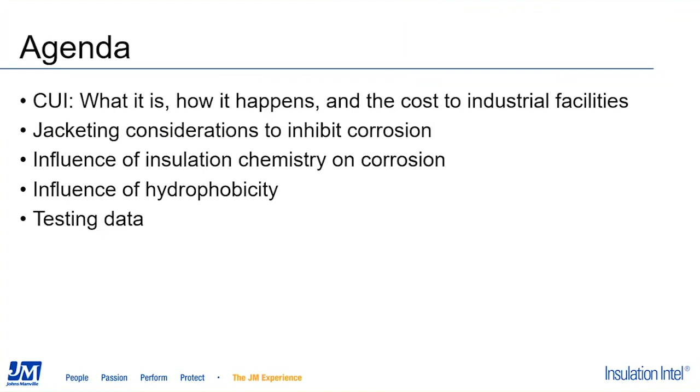So let's get started and take a look at what we're going to cover today. We're going to start by looking at corrosion under insulation, or CUI, and do a brief overview of what it is, how it happens, and its impact to industrial facilities and the global economy. Then we'll look at different aspects of corrosion under insulation and consider the impact that jacketing can have on inhibiting corrosion, the influence of insulation chemistry on corrosion, and the impact that hydrophobic or water-resistant insulation products can have. We'll follow that overview with detailed information on different testing performed to evaluate the direct impact of different insulation materials on corrosion under insulation.

So let's get started and take a quick look at corrosion under insulation. In 2013, NACE, the National Association of Corrosion Engineers, did a global study called the Impact Study to try to assess the cost impact of corrosion. They concluded from the results of their study that the global economic impact was about $2.5 trillion.

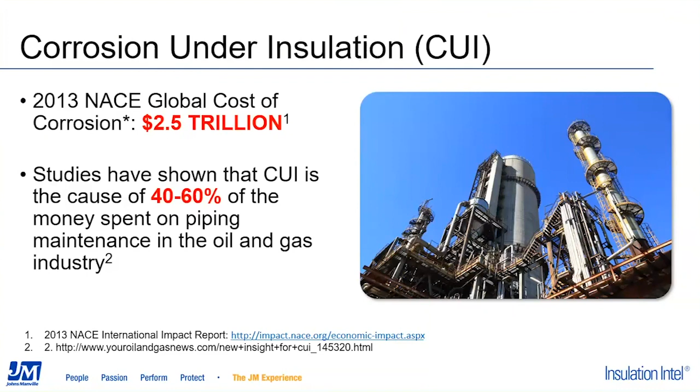Additional studies have been done looking more specifically at the impact of corrosion on corporate spending for maintenance budgets, and have shown that in the oil and gas industry in particular, about 40 to 60% of maintenance budgets are typically allocated toward addressing the impact of corrosion under insulation. So you can see that the financial impact is quite significant.

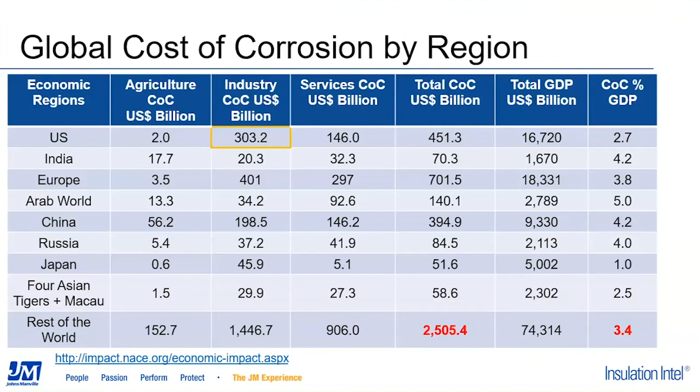On a global basis, that $2.5 trillion figure represents about a 3.4% impact on gross global product. So again, reiterating that the financial impact of corrosion is very, very severe.

For corrosion to occur, you actually need a combination of conditions to be present. Those conditions are the presence of oxygen and the presence of liquid water. While water vapor itself will not create corrosion, it doesn't take much for water vapor that gets into an insulation system to turn into liquid form. So if you have significant water vapor ingress in your system, you do have the potential for corrosion to occur anyway, because it's very likely that it will turn into liquid water.

You do need a corrosive environment, and that can be either corrosives entering the insulation system from the outside environment, or potentially corrosive compounds or materials being leached out of the insulation system itself. That needs to be acidic, or have a pH of something less than 7. And then the system needs to be operating in what is referred to as the corrosion zone, typically considered to be that temperature band between 100 and 350 degrees Fahrenheit.

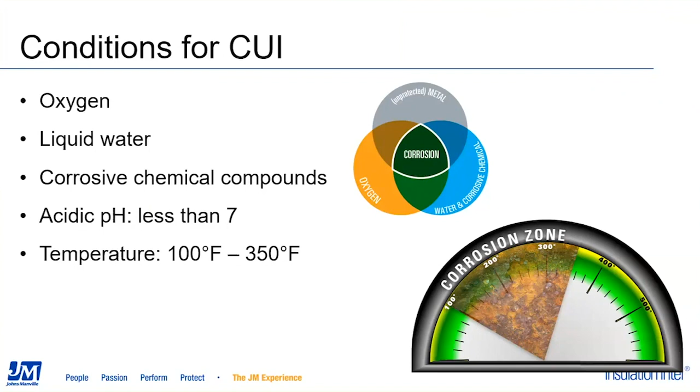So you can see there are a combination of conditions that need to be present, and some environments will introduce those conditions to a higher or lesser degree than others. Therefore they have a significant impact on the exposure of the system to the opportunity for corrosion to occur, and also impact the type of corrosion that happens and the rate at which it happens.

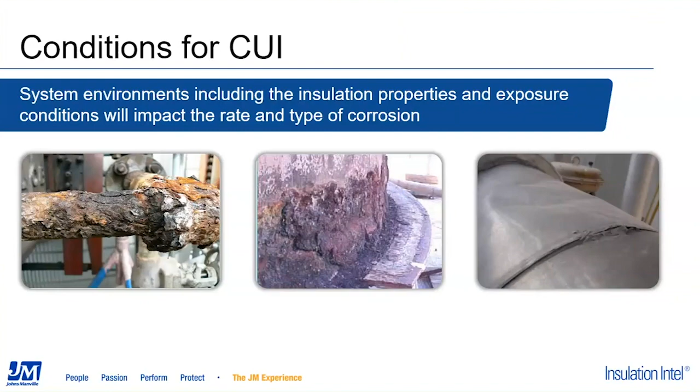And now Chad will talk a little bit about the different types of corrosion that we can have. There are several different types of corrosion that we can see. We can see 2 dissimilar metals in the environment causing corrosion to each other.

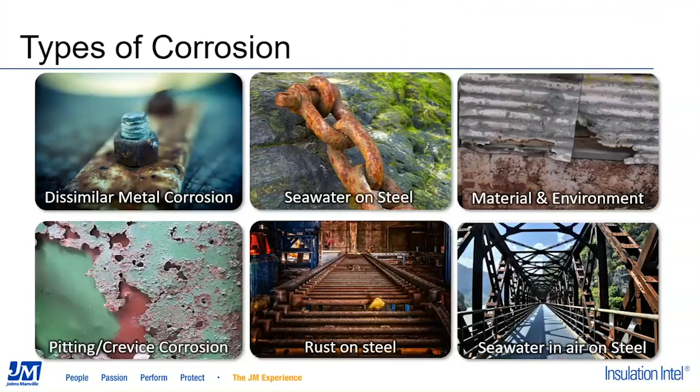You can have salt water in direct contact with steel. You can have salt water just in the open air over time corroding the steel. You have simple rust on steel, or materials in the environment over time causing corrosion. But what we want to focus on today is more of the pitting or crevice corrosion that can occur.

What is pitting corrosion? Pitting corrosion is a more localized form of corrosion. This can form holes or pits in the metal. This occurs when one area becomes anodic compared to the other areas around it, and this can lead to a failure with minimal overall metal loss.

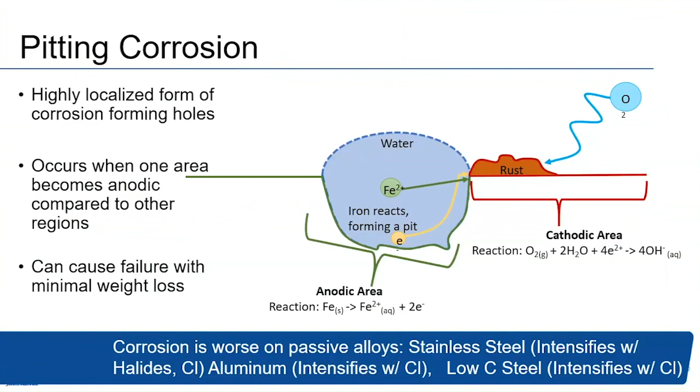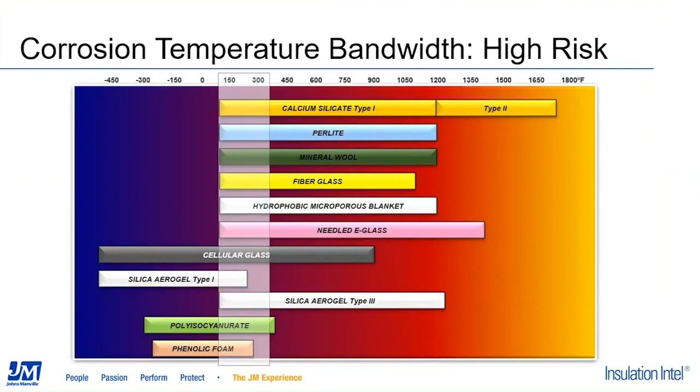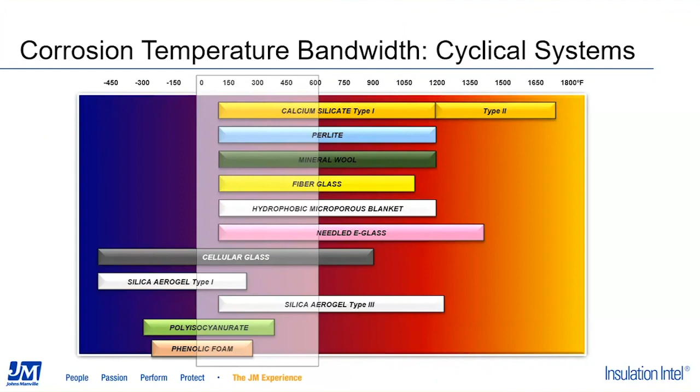The other area we want to talk about is a cyclical system. It's going to cycle between hot and cold, anywhere from below 0 up to 600 degrees. Could be a simple steam system that for half of the year is running steam distribution and the other half is running ambient. But this is what we would call more of your critical system for CUI. So if you have something cyclical, you want to pay a little more attention to a system like this for CUI concerns.

So how can we inhibit or prevent CUI? Some people would say that we really can't prevent it, all we can do is slow it down. So we're going to take a few minutes today to talk about how the insulation itself, the chemistry, can impact CUI, and how the metal jacket can be your first line of defense.

Hello, this is R.T. Boehm, and I will be discussing the metal portion of the webinar as it pertains to CUI. There are 3 important aspects of metal jacketing and how they relate to reducing the amount of corrosion that can occur, including the classic CUI on pipe, tank, and equipment, but also corrosion to the metal jacketing itself. The 3 primary aspects are metal types and alloys, the value of using polyfilm moisture barrier on the interior of the metal jacketing, and the critical importance of a proper installation.

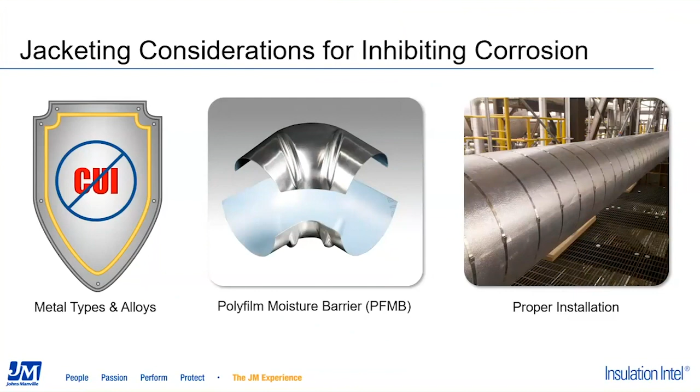In North America, there are 2 types of metals, various alloys, and some coated metals used in the mechanical insulation industry. From top to bottom of the table, metal jacketing materials are shown in order of increasing resistance to corrosion, but as the material becomes more resistant to corrosion, it also becomes more expensive. There is not a single best jacketing material - there are a lot of factors to be considered by the project engineer, including corrosion resistance, cost, weight, strength, and fire resistance.

Aluminum jacketing comes in 2 interchangeable alloys, 3003 and 3105. Aluminum is the most commonly used metal jacketing in North America. Its performance, including corrosion resistance, is adequate for most projects. Painted aluminum offers better corrosion resistance than bare aluminum, and also has a higher emittance, which can be important to some applications.

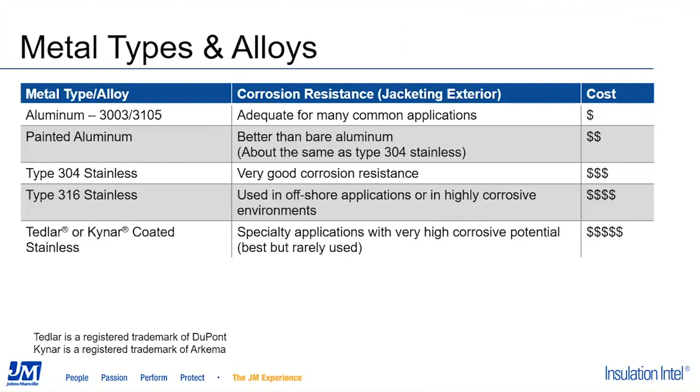The next step in corrosion resistance and cost is type 304 stainless steel, used where the ambient environment provides an increased but not huge risk of corrosion - an example might be a facility near but not directly on a seashore. Next, type 316 stainless steel might be used in a particularly harsh outdoor climate, such as offshore or directly on the seashore. Finally, the most expensive is stainless steel metal jacketing with either Tedlar film or Kynar paint, rarely used although very effective in the harshest environments.

Next, we will discuss the value of polyfilm moisture barrier, or PFMB. PFMB is a 76 micron, or 3 mil thick, plastic heat laminated to the interior of the metal jacketing. This is not a proprietary product and is available from all jacketing companies. The purpose of PFMB is to inhibit corrosion on the interior surface of the metal jacketing by preventing moisture from contacting the inner surface - basically, it's a plastic barrier on the interior of the metal jacketing.

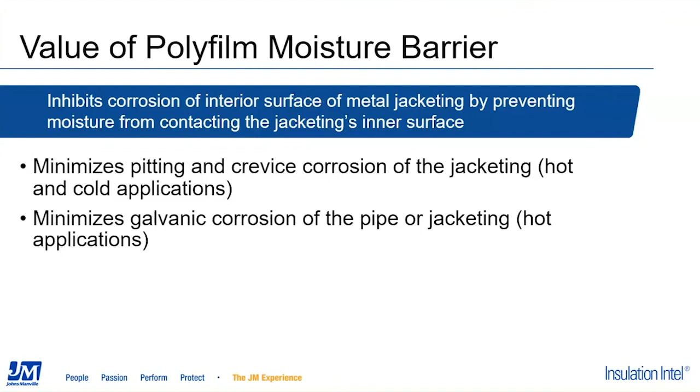PFMB will minimize pitting and crevice corrosion of the jacketing on hot and cold systems, but also minimize galvanic corrosion to pipe or tank on hot applications where there is not a vapor retarder on top of the insulation. PFMB offers superior performance over the 2 older, outdated technologies used, known as polykraft or painted barriers.

PFMB is not a vapor retarder. A vapor retarder goes on the outside of the insulation to reduce the entry of water vapor into the insulation system. PFMB goes on the inside of the metal jacketing, and its purpose is to reduce the likelihood of certain types of corrosion.

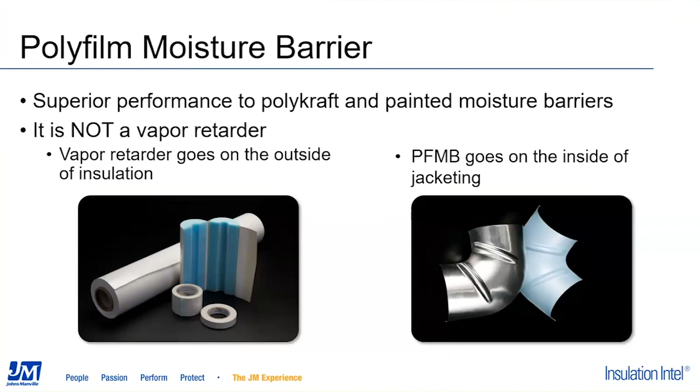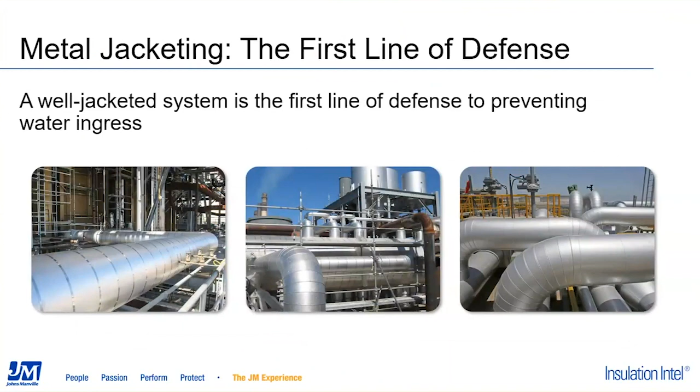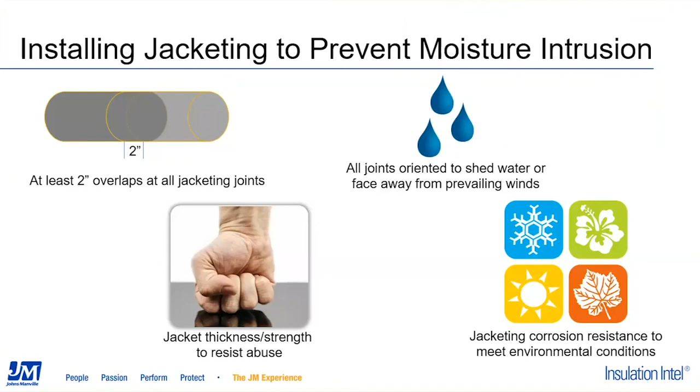Now we will discuss the value of metal jacketing and the importance of a proper installation. A well-jacketed system is the first line of defense to preventing water ingress. There are many important aspects to metal jacketing installation to help minimize moisture entry into the insulation system. First, ensure there's a 2-inch overlap on both the longitudinal and circumferential joints. Next, ensure joints are orientated naturally to shed water and face away from prevailing winds. We have previously discussed the value of PFMB, and also ensure jacketing strength and thickness are adequate to resist mechanical abuse and environmental conditions like acid rain, high humidity, and on and off seashore locations.

Metal jacketing is typically 36 inches wide and is sized to fit around the insulation while leaving a 2-inch overlap. The longitudinal overlap is positioned to naturally shed water from or face away from prevailing winds.

The circumferential or butt joint is at either end of the metal jacketing and also requires a 2-inch overlap. This joint as well should be orientated to naturally shed water or face away from prevailing winds.

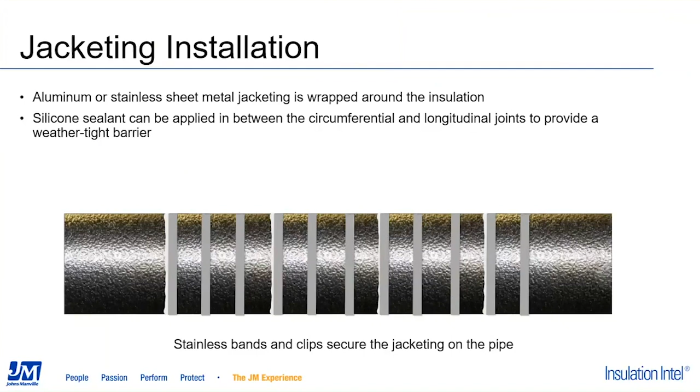Depending on the type of system, hot or cold, the jacketing will require either screws, rivets, or banding with wing seals. It is important on cold systems never to use screws or rivets, as these products will pierce the vapor retarder. A sealant or silicone can be applied to the metal jacketing, although this is controversial.

Whether to seal metal jacketing is a controversial topic and is up to the individual specifier. There are many pros and cons to this topic, and it has not been studied scientifically. On the pro side, sealing will prevent water from entering into the insulation system, which certainly makes sense. On the con side, water is able to exit from improper installation or seams.

This is especially important on hot systems, where the pipe and tank are high in temperature, and the potential for water egress from the insulation material is much greater than in cold applications.

Also, sealing will cost more money and time. There's also a concern of the system's expansion and contraction. This will damage the seal and can result in a waste of time and money. Ultimately, it's up to the individual specifier to seal or not to seal.

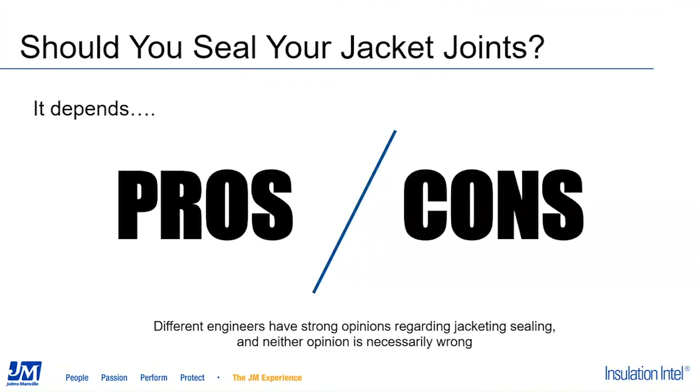If a sealant is used, it is critical that you seal the inside of the joint and not the external lip. Most sealants are not UV stable and cannot be exposed to sunlight.

We have discussed how proper material selection, system design, and installation of metal jacketing are important to the success of the insulation system's performance. The main function is to inhibit water intrusion, and if no water enters into the system, then there cannot be CUI.

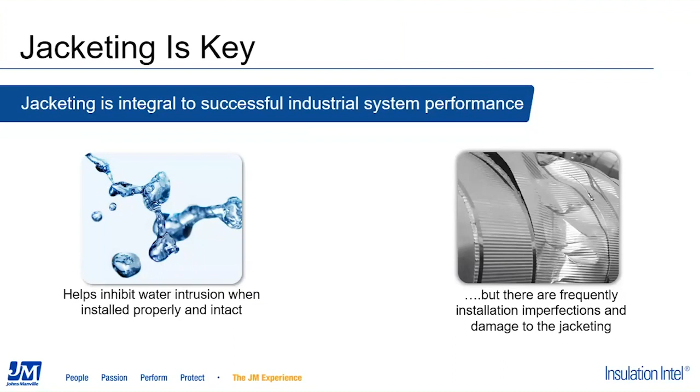However, if metal jacketing is damaged, not installed properly, or sealant fails, additional lines of defense against CUI are necessary. Metal jacketing can reduce intrusion, however, water is inevitable. So you need a backup plan or additional lines of defense against CUI.

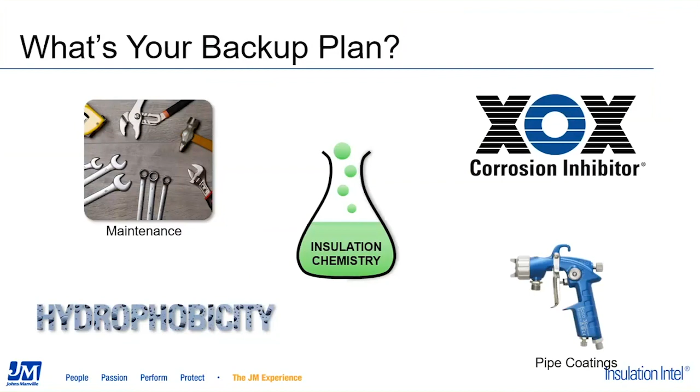Items to consider: coatings, pipe and tank with corrosion inhibiting coatings or gels, proper system maintenance, choosing proper insulation materials such as hydrophobic or XOX additives that help inhibit CUI. This brings us to the next section with Scott Sinclair to discuss combating corrosion in insulation materials.

Thanks, RT, for an excellent overview of the impact that the metal jacketing system can have on corrosion under insulation. As RT said, I'll now talk a little bit about the impact that the insulation material itself can have on CUI.

One of the primary features that many insulation manufacturers are offering these days to help combat the opportunity for corrosion under insulation to occur is by making their materials hydrophobic, or water resistant, water repellent. Hydrophobic insulations are designed to help prevent water intrusion.

There are many different insulation material options available that do offer this feature, and most are designed such that they allow water vapor to still pass through the system, even though they will repel liquid water.

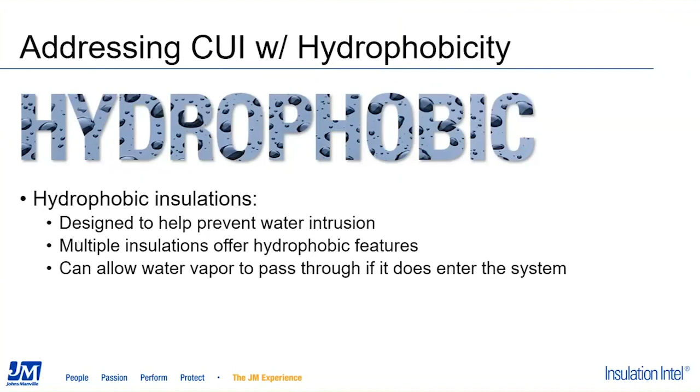To do a quick overview of some of the options available for hydrophobic or water repellent insulation materials: the Johns Manville MinWool-1200 pipe insulation is a water repellent or water resistant product, as is the Thermo 1200 calcium silicate. The InsulThin HT and Sproule WR-1200 perlite are both hydrophobic products.

In addition, most of the silica aerogel products that are available are considered hydrophobic, as well as cellular glass insulation, very often used in ambient and below applications, where cellular glass is considered to be a zero perm material.

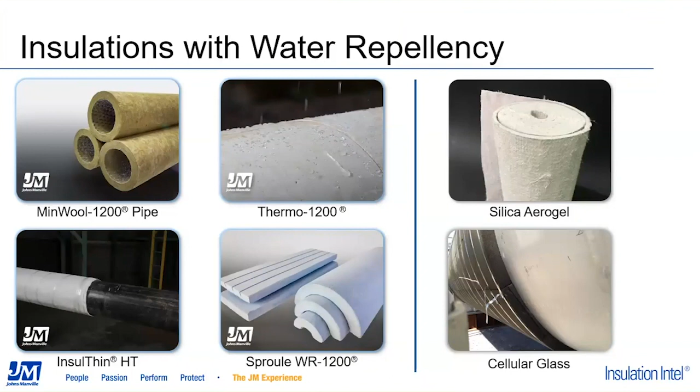However, you do need to pay very specific consideration to the seams, as the seams and joints obviously will not be impermeable to moisture and water.

But you do have to pay attention to one very critical aspect of the features of hydrophobicity and water repellency, in that most materials get this capability by the addition of a treatment, usually an organic silicone, in the insulation material during the manufacturing process.

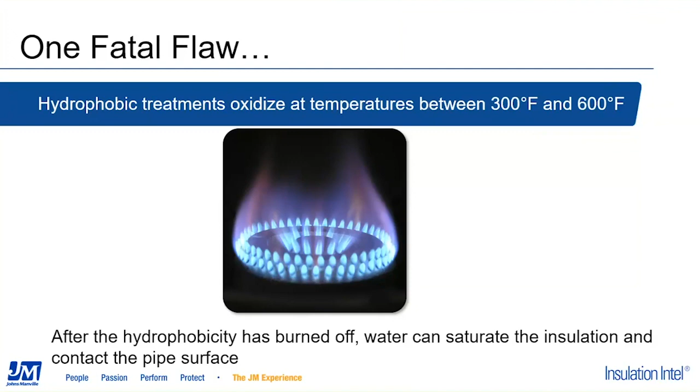Most of those treatments, as I mentioned, are organic in nature and therefore will oxidize or burn off at temperatures between 300 and 600 degrees Fahrenheit. Once the material has been exposed to those temperatures for any significant amount of time and that organic treatment has burned off, water will then be able to penetrate and saturate the insulation material and come in contact with the pipe surface, thereby contributing to the opportunity for corrosion to occur.

Once that material loses its hydrophobicity, insulation chemistry now becomes a much more critical factor in looking at how the material can impact CUI and help try to prevent or delay the occurrence of corrosion under insulation.

The ability of the insulation chemistry to impact corrosion under insulation has been demonstrated through two different test methods that have been developed. The first is the ASTM C1617 standard and test protocol, and the second is a newer long-term test protocol that's being developed to be more indicative or replicate real-world conditions, but under an accelerated corrosion timeline. We'll review information for both of these today.

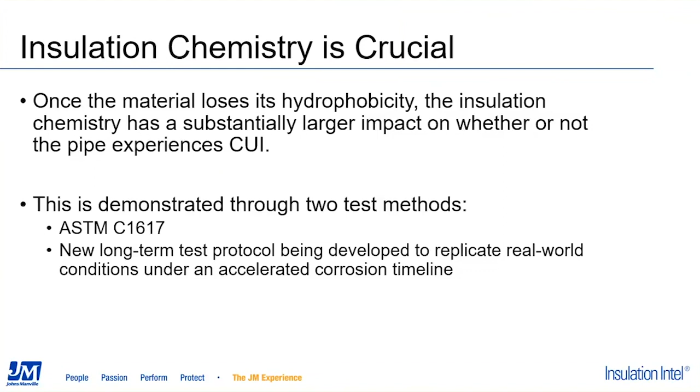Let's start with the ASTM C1617 test protocol. One of the big advantages of this as compared to some prior test protocols is that it was designed specifically to look at corrosion on carbon steel, whereas many of the prior standards were focused on stainless steel.

The procedure for performing this test is to take the insulation material, grind it into a powder, or shred it as finely as you can, mix it with DI water, blend it together, then filter out the remaining solids so that all you have left is the liquid with any compounds or materials that may have leached out of the insulation itself that could contribute to corrosion.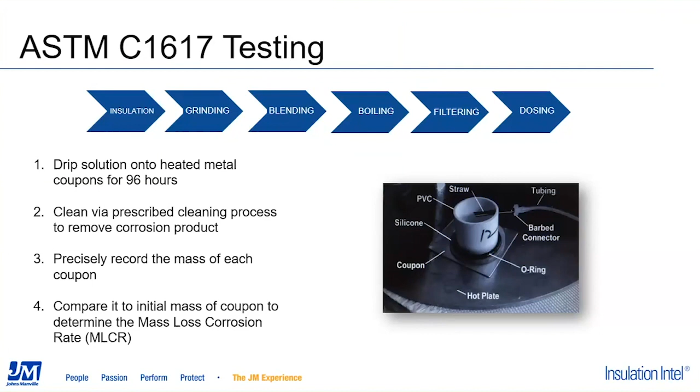So if we take a look at some of the results that have been developed using this ASTM C1617 method for evaluating the impact the materials will have, this is some data that was developed by a third-party outside laboratory.

What it is representing is the mass loss corrosion rate ratio between the insulation material and the baseline corrosion rate for DI water. DI water, as many of you probably know, is considered to be pretty inert and not have a high level of any type of contaminants in it. So using that as a baseline gives you a good comparison for looking at the corrosion rate as a result of introducing anything that may have leached out of the insulation.

If you look at the three bars on the left half of the chart, the orange, gray, and dark red bars representing the results for silica aerogel and water-resistant mineral wool products, you can see that they had a mass loss corrosion rate ratio between 2.5 and 3.5 times that of DI water, whereas the material represented by the blue bar in the middle of the graph, which is the Insul-Thin microporous thin blanket material, had a corrosion rate very similar to that of the DI water, and the Thermo 1200 calcium silicate and Sproule WR-1200 perlite products both had a mass loss corrosion rate ratio significantly less than that of the DI water.

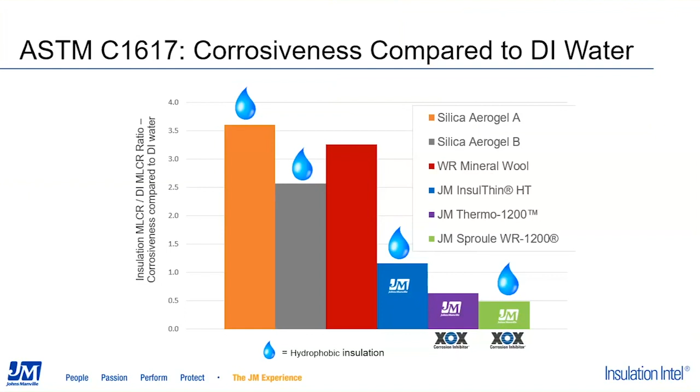As we'll demonstrate a little further in the discussion, that is a direct result of both of those products containing the XOX corrosion inhibitor.

So you can see from this data that products containing the XOX corrosion inhibitor, that being the Thermo 1200 calcium silicate and the Sproule perlite, have a mass loss corrosion rate that's less than half of that of DI water, so excellent performance in helping to prevent and delay the opportunity for corrosion to occur, whereas the silica aerogel and water-resistant mineral wool products all had mass loss corrosion rate ratios significantly higher than that of the DI water, demonstrating that those products all did introduce additional compounds or chemicals into the system that could contribute to an accelerated rate of corrosion.

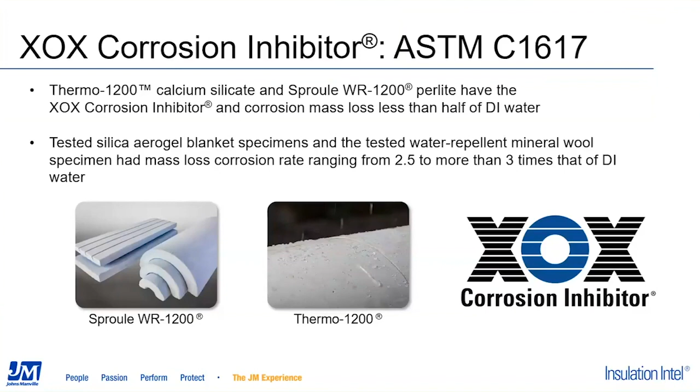Some additional analysis done at the conclusion of this test looked at the residue left behind on the surface of the coupons. It demonstrates that the two products at the top of the chart, the calcium silicate and the perlite, both containing the XOX corrosion inhibitor, showed very little to no presence of iron on the surface, which would be indicative of a corrosion condition. Both also showed a very high prevalence of silicon and sodium ions on the surface, which is a direct result of the corrosion protective features of the XOX corrosion inhibitor. We'll talk about that more in the following slides.

The next material down on the chart, the hydrophobic microporous blanket, while it did not show a significant or similarly high rate of silicon and sodium ions being left behind, it did still show an extremely low level of iron behind, again clearly showing a very low corrosion rate.

Whereas the last two products on the list, the water repellent mineral wool and the silica aerogel blankets, both showed very high percentages of iron on the surface of the coupon, indicating significant levels of corrosion and very low levels of silicon or sodium ions, again showing very little protective compounds present in the materials.

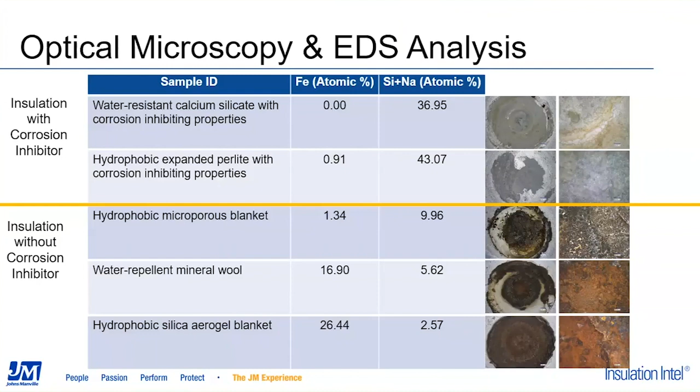Now let's take a look at the longer-term testing that Scott discussed a little bit ago. This test was developed by leading industry experts, and it's meant to be longer in duration, a 6-month test. What we're trying to do is basically take a pipe to failure in 6 months and then analyze the results, boiling down what a pipe would see roughly in its lifetime, 20 to 30 years, into a 6-month period.

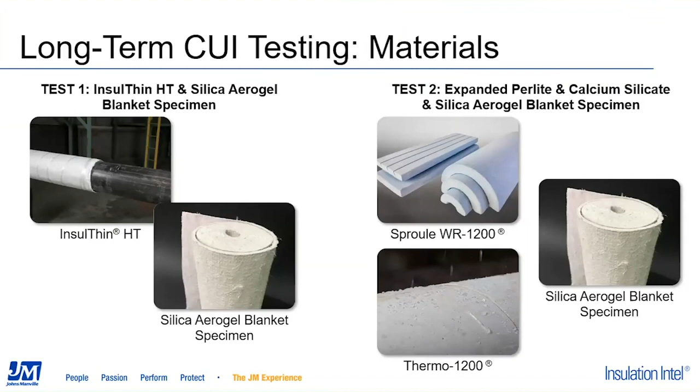This test has been run twice. The first test was run with the Insulthin HT product and silica aerogel. The second test was run with the perlite, the Sproule WR-1200, the calcium silicate, and the silica aerogel blanket. So if we take a look at what we actually did with the test, we're going to focus on the pictures in the top right of the screen.

Out of those two pictures, the one on the left is an overhead shot of the testing vat, where you see the actual pipe. It is insulated and has the metal jacket on it. What you don't see is that on the underneath side there's a hole drilled in that jacket, the purpose of which is to allow moisture and water to infiltrate the system. On the upper right-hand part of the screen is the picture of the actual testing vats full of liquid.

So what did we do? We tried to simulate wet and dry conditions over this 6-month period, going from filling the vats to draining the vats at temperature and then at ambient. For 2 of the 6 months, the vats were filled with regular tap water, and for 4 of the 6 months, they were filled and drained with a 1,500 part per million chloride solution.

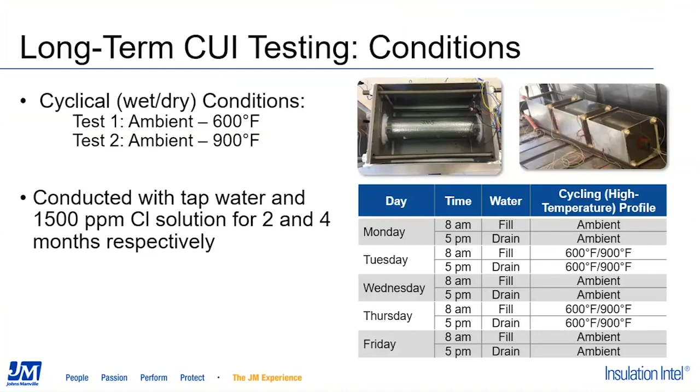If we take a look at the actual results here, this is the results of the first test, and you can see on the left the pictures of the pipes. The top pipe is your Insulthin HT, and the bottom pipe is the silica aerogel pipe specimen. Again, we're going back to that pitting and crevice corrosion we were talking about, and what we're looking at on the chart on the right is the pitting depth. You can see the maximum pitting depth on the Insulthin HT sample was less than that of the silica aerogel specimen.

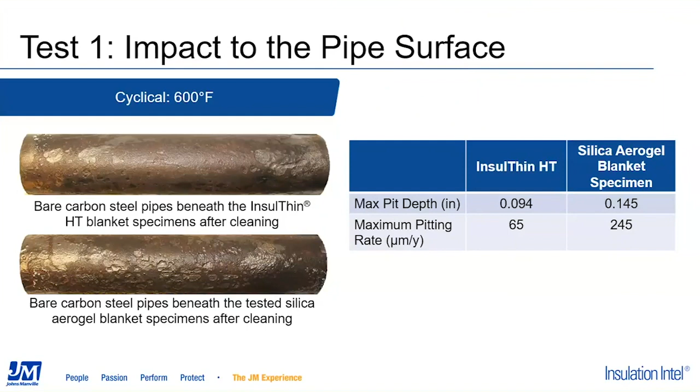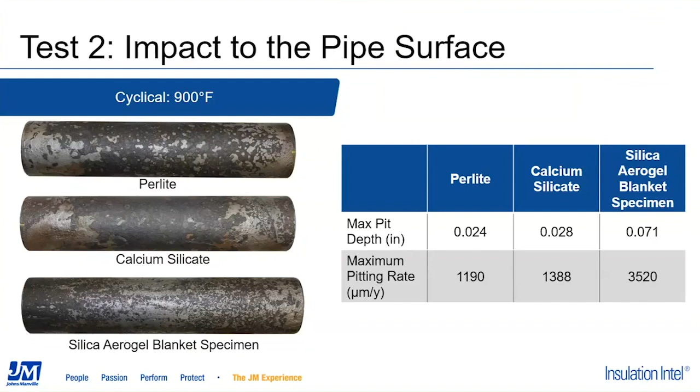So we've talked a lot about this pitting and crevice corrosion, but I like to look at pictures.

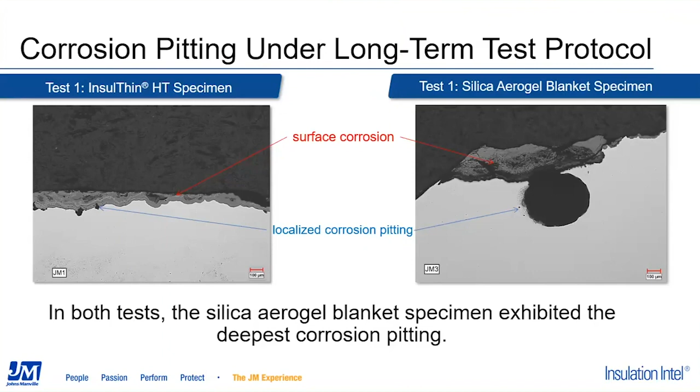Now looking at the sample on the right, this is the silica aerogel specimen. Again, the white on the bottom is the actual pipe itself, and the black at the top is background noise. You can see the red line pointing to the surface corrosion, and then we can see that pit extends further into the pipe specimen. With this pitting corrosion, this is where you could actually have a failure with minimal overall wall thickness loss of the pipe.

We want to better understand just how the impact of the insulation chemistry really pertains. So what's going on here? We're going to take a look at the insulation chemistry of some of the products.

The first thing we're going to do is look at the XOX corrosion inhibitor compared to something that's hydrophobic. If we look at the attributes, the XOX corrosion inhibitor, and in most products that are hydrophobic, that is integral to the product. The XOX product will not burn off in applications above 600 degrees, where the hydrophobic product will burn off at elevated temperatures over 600 degrees. While the XOX does not fight water ingress, the hydrophobic product does, but the XOX is present for the life of the product, there from installation until the product is removed, while the hydrophobic product may or may not be. The life of the hydrophobic agent depends on the temperature the product sees over its lifetime and the time at that temperature.

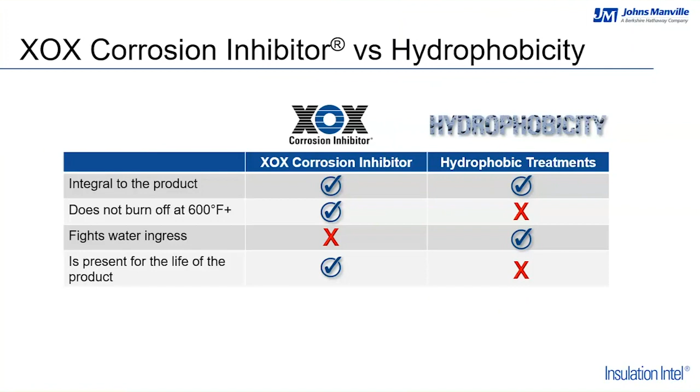Let's take a look at what the XOX corrosion inhibitor is doing and how it can help contribute to delaying or significantly protecting against the opportunity for corrosion to occur. The XOX corrosion inhibitor is basically an alkaline compound, a combination of calcium, sodium, magnesium, aluminum, and potassium silicates. These alkaline components introduce a high pH, or alkaline nature, to the insulation system.

If for some reason you get the introduction of corrosive ions into the system, typically from the outside environment, such as acid rain, or if this is a facility that produces a caustic compound creating a caustic atmosphere, those corrosive ions entering the insulation system will combine and react with the alkaline ions from the corrosion inhibitor. The acidic or corrosive ions get neutralized and the pH is brought back up to 7 or above, hopefully eliminating the opportunity for that corrosive environment to be present in the insulation system and at the surface of the pipe. That's the first stage of protection, buffering the introduction of any possible acidic elements to the insulation system.

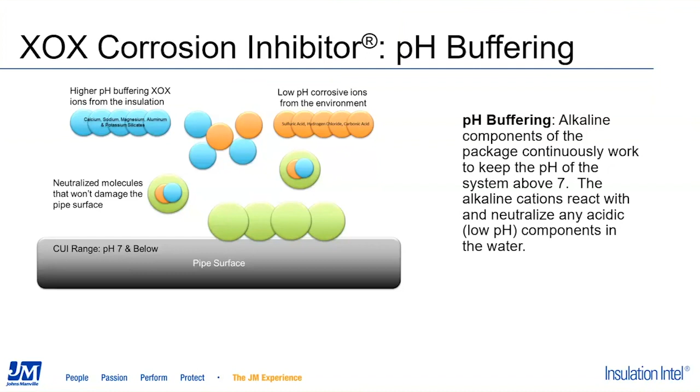The second level of protection that the XOX corrosion inhibitor provides is by creating a protective coating on the surface of the pipe or equipment that has been insulated. If water penetrates the insulation system, as it penetrates the material it will dissolve the molecules of the different silicate ions in it, and carry those silicate ions to the surface of the pipe or vessel. Those ions react with the surface of the metal and form a protective silica gel or coating. It's not a coating you can see, it is molecular in thickness, but it's a protective coating that will remain for the rest of the life cycle of that system, providing that protective layer on the surface of the metal.

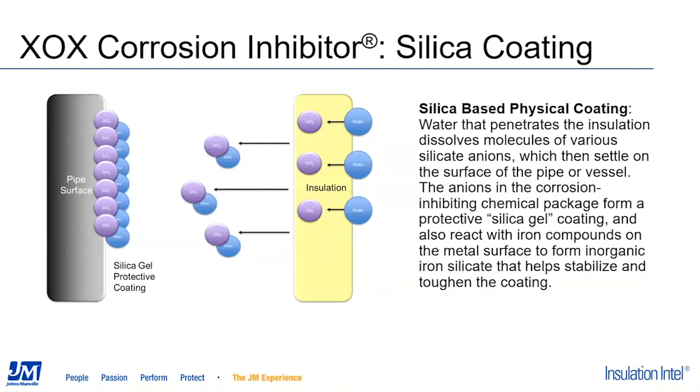So if you do get future introduction of water into the system, or the future introduction of any acidic or corrosive compounds into the system, that protective layer will shield the pipe from the opportunity for it to corrode the surface. You can see that insulation chemistry is very important to protecting your system against corrosion under insulation, a much stronger influence than the insulation material just being hydrophobic or water resistant. That is primarily through the ability of the material to provide a protective layer on the surface of the metal, and therefore protect it against the opportunity of corrosion occurring.

And that protective layer or surface layer will be made up of known corrosion inhibiting chemistries, basically those sodium and silicate ions or other chemistries that are part of the formulation of that compound.

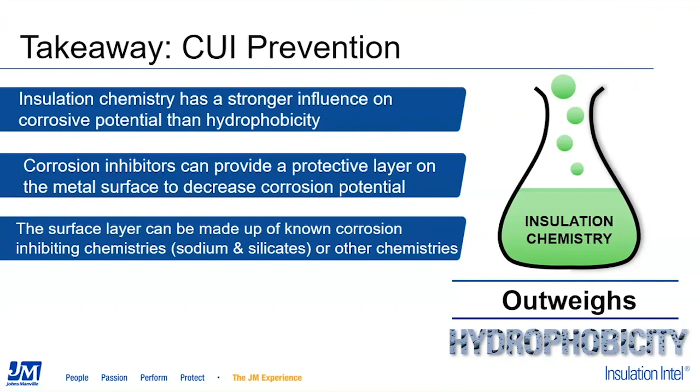So taking a quick overview of everything we've reviewed with you today, as RT very eloquently pointed out, your first line of defense is a well-sealed and properly installed jacketing system, with careful attention paid to making sure the appropriate materials are selected based on the operating and environmental conditions of the facility. While hydrophobic and water-resistant insulation materials can help and do have their place, it's important to keep in mind that depending on the operating conditions of the facility, that protection may or may not be there for the life of the installation and the insulation material.

So you can't count on them to be a cure-all for helping to delay or prevent corrosion under insulation. And as we've reviewed with you, industry-recognized test methods have demonstrated clearly that insulation chemistry has a much more significant impact on the corrosive potential than just the material being water-resistant or hydrophobic.

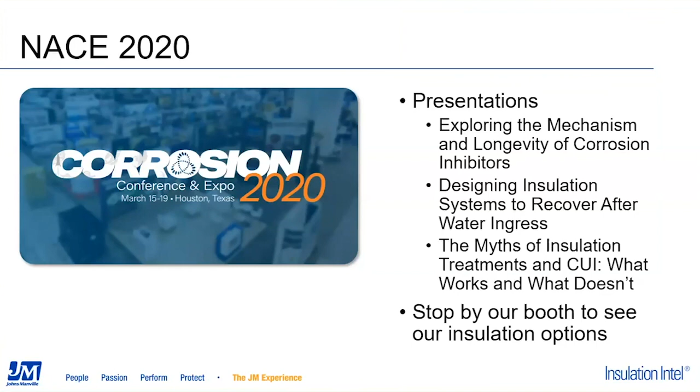Our Engineering Advisory Councils are an opportunity for our industrial engineers to speak to JM, basically, as an insulation manufacturer, and you can tell us about your pain points, trends you see occurring throughout the industry, and how JM can actually help make your life easier.